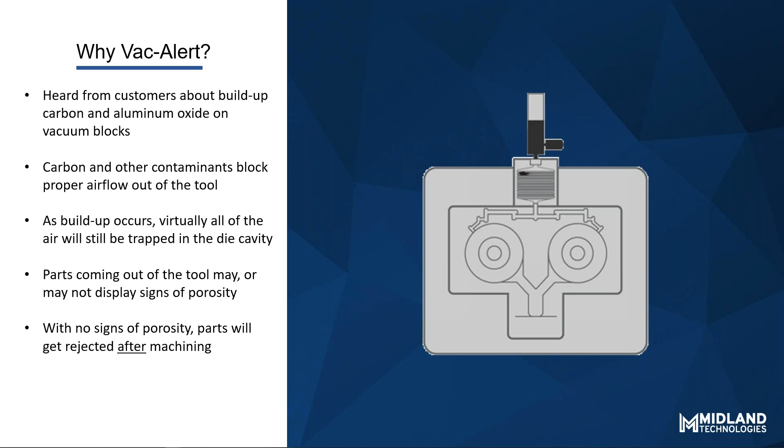So with that, the customers asked us, hey, is there any way to solve this problem? And after looking at it, we thought of a couple of different routes to go, and that led us to developing the Vac-Alert system. So there's a diagram off to the right, and it's a hardware-software system combined with transducers or vacuum sensors to monitor the vacuum system from end to end, essentially all the way out at the tool and feeding back to the vacuum pump on the other side. And the key to Vac-Alert is it can detect the vacuum level in the die cavity in real time.

And the other benefit is that it monitors key components and alerts you of situations before maintenance is needed. So it helps to troubleshoot and narrow down where a potential clog or issue is within the vacuum system. It also alerts the operator when the vacuum level is too low, and that's through the HMI system. The nice thing about our product is that you can use your own vacuum pump, whether it's a central vacuum pump or a vacuum pump at each cell that you're utilizing vacuum on for die cast machines.

So here's a larger diagram of the Vac-Alert system, and it shows the sensors all feeding back to the HMI, and again, out at the actual tool itself. And here is the iBlock, which is the heart of our system, and I'll get into that in a little more detail.

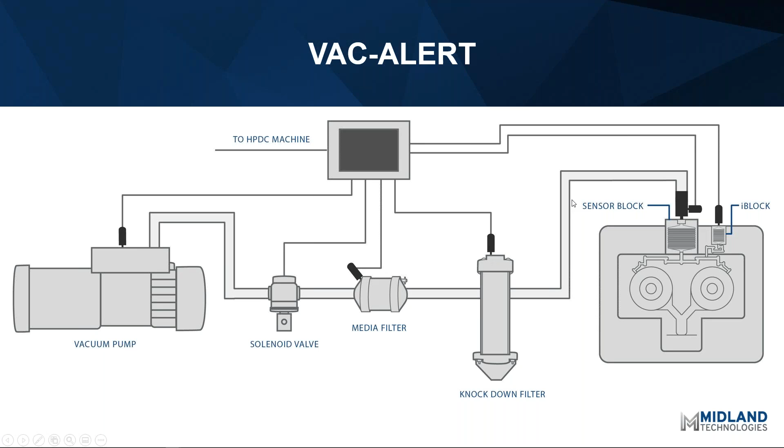But so how does the system work? Well, this is the main page of the Vac-Alert touchscreen display, and it shows the vacuum level at each one of the sensors right before fast shot.

So you can adjust Vac-Alert to set up and take a snapshot, and that's essentially what this is, a snapshot of the vacuum level, and preferably you'll want to have that configured and set up to happen right prior to fast shot so that you know what the maximum vacuum level is in the tool before the aluminum is injected

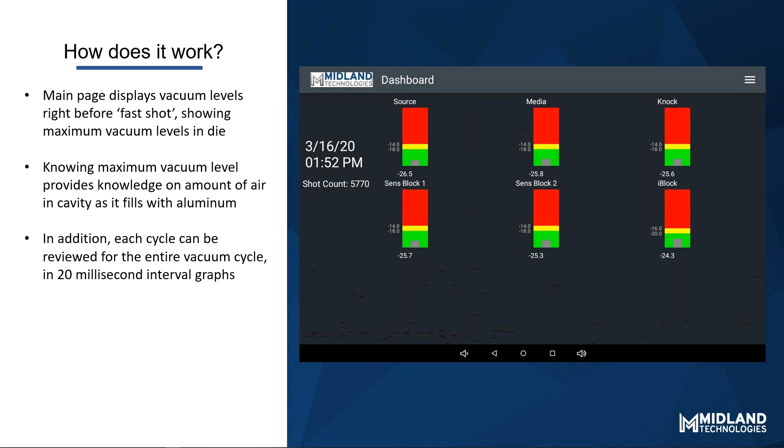into it. The nice thing about our transducers that we have as a part of the system is that it will measure the vacuum level at every 20 millisecond intervals. So 50 times every second, it is sampling the vacuum level at each one of those sensors.

And here is data from a customer site during some initial testing that we had done. And I'll kind of walk through this. These four lines right here represent sensors that are both at our filters as well as at the blocks within a tool. And the darker blue line down here is a sensor measuring the vacuum level right before the solenoid valve, essentially monitoring the vacuum level in the pump.

So once the solenoid valve opens, you see a loss of vacuum level within the pump, but that correlates with a drop in vacuum at all the other components in the system. So as air is being drawn out of the entire vacuum system from the solenoid valve all the way out to the tool, you can see this drop in vacuum to a point where a little over a half a

second into the valve being open, we've got about 75% of the air removed, and it continues down, and right before fast shot, which is right here, we're down in maybe the 27 inches of mercury level, somewhere in that neighborhood. So that led us to further validation that this is a good course to take.

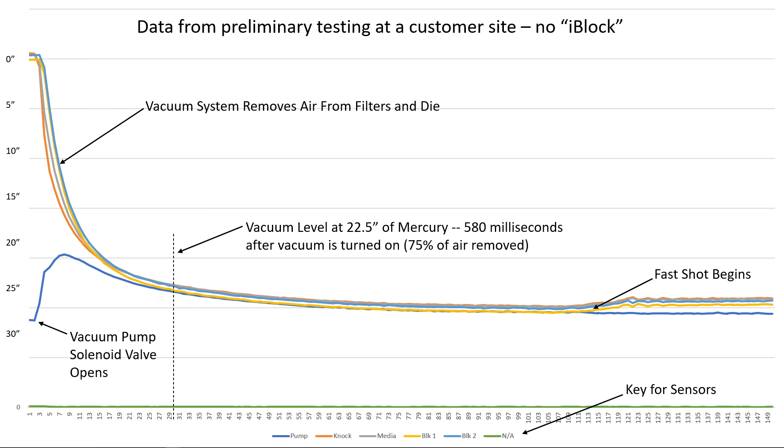And we started doing some additional evaluation and thought, hey, well, what if we install an additional block that is just measuring vacuum level within the cavity, and what kind of value would that add? So this is a piece of data where we added that iBlock to measure the vacuum level within the cavity itself.

Again, the same principle. Here are all of the other components in the vacuum system, and then this one is measuring specifically the vacuum level within the cavity. Now I'm going to go to the next slide, and you'll notice a very subtle difference in the curves right in this area, but you're going to see a significant change in the iBlock. It's going to be up much higher.

And what we did in this scenario was we blocked off or restricted the airflow for the valveless vacuum blocks, representing a clog in the blocks to show what would happen and what the iBlock would measure.

So as you can see here, there's a significant drop in the vacuum level within that cavity itself, and there was such a subtle change right here within these vacuum curves, but they much more quickly drop down to a near perfect vacuum. And I'll just go through those again and toggle between them.

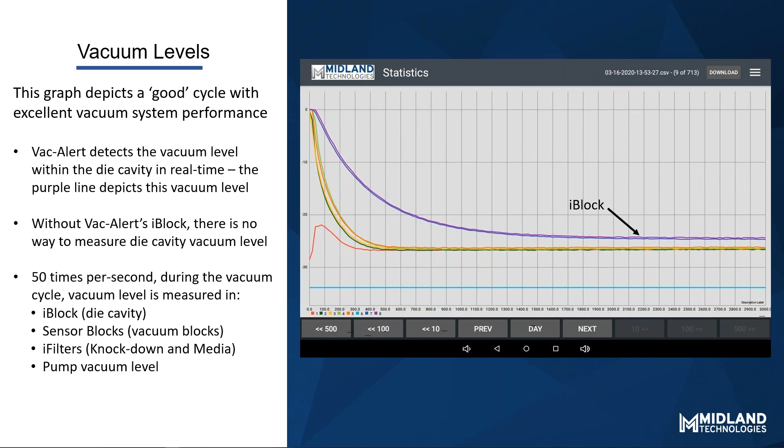So recognizing this, we realized that the iBlock is really the critical piece in the puzzle that will help die casters know what that level is within the cavity. And so we kept going down the path of developing our system with this additional block that utilizes a transducer at the top of it.

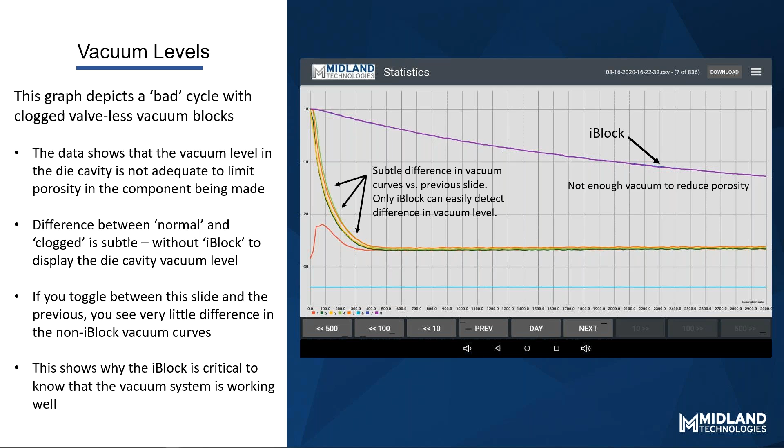In addition to that, one of the other features of the Vac-Alert system is the ability to go backwards by individual shots or by 10, 100, or 500, so that you can see the evolution of these curves over a period of time, whether it's a couple of hours or a shift or multiple shifts or even days. You can set this up and click on the day button,

and it will allow you to select other days that you may be running that exact same part, so that you can see how this iBlock is performing, so that as you see this start creeping up, you can stop everything and evaluate

whether there's any buildup on the block itself, or maybe within the different filter system or other places within the vacuum system, to do some preventive maintenance and do it at the appropriate time, rather than doing preventive maintenance too frequently, or worse, too infrequently, and therefore creating bad parts.

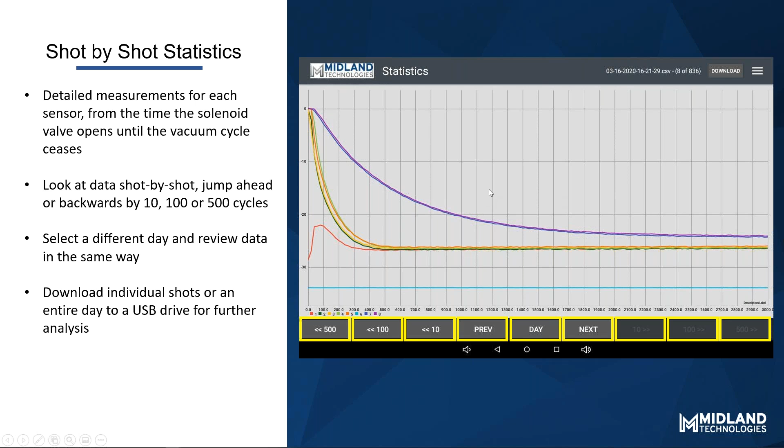The other nice thing with this statistics page within the Vac-Alert system is it allows you to also download specific shots onto a USB drive, so you can put it into an Excel spreadsheet and do further analysis.

So the iBlock is the heart of our system, and here it's designed into a runner system, but you could have it designed right into the side of a tool or into the cavity itself to measure that air. And again, it measures the vacuum level during the casting process.

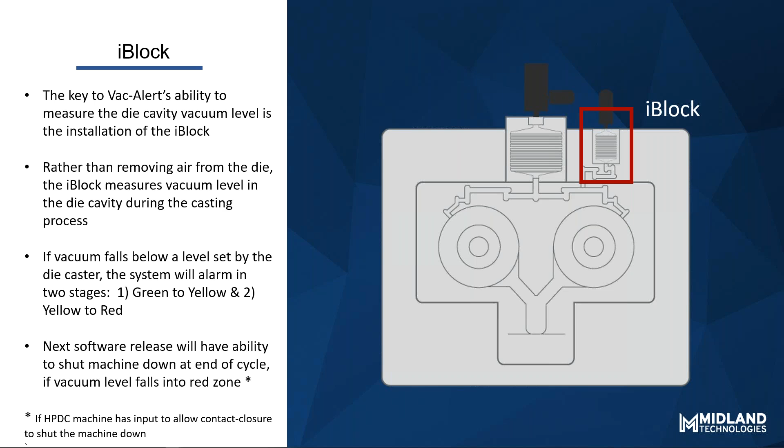And if the vacuum level falls below a certain level, you can utilize the Vac-Alert system to warn you or alert you of levels that reach a point where you're still making good parts, but it's getting closer and closer to a point where vacuum level falls low enough that you're going to see porosity and significant porosity issues.

Our next software release is also going to have the ability to shut the machine down at the end of the cycle if the vacuum level falls into a red zone. Again, that red zone is something that's adjustable by the user to whatever inches of mercury or negative PSI or however you want to set it up within the system.

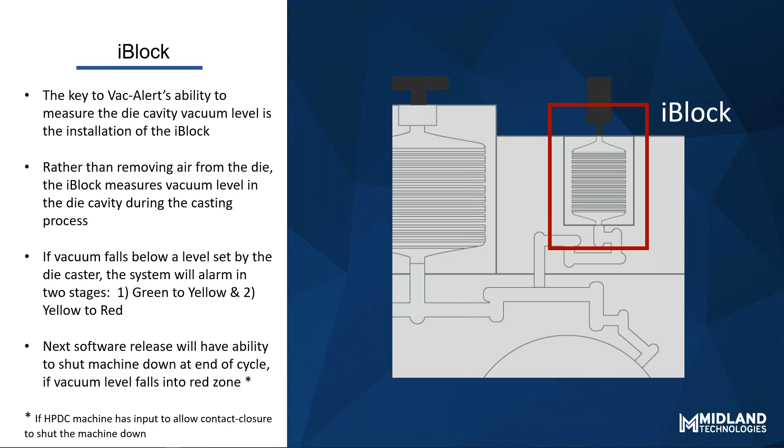But again, here's a closer look at the iBlock. It is what Midland refers to as our mini block. So it's the smallest block in our family of valveless vacuum blocks. And we did a great deal of testing to validate that we can indeed use that smallest block for the majority of applications.

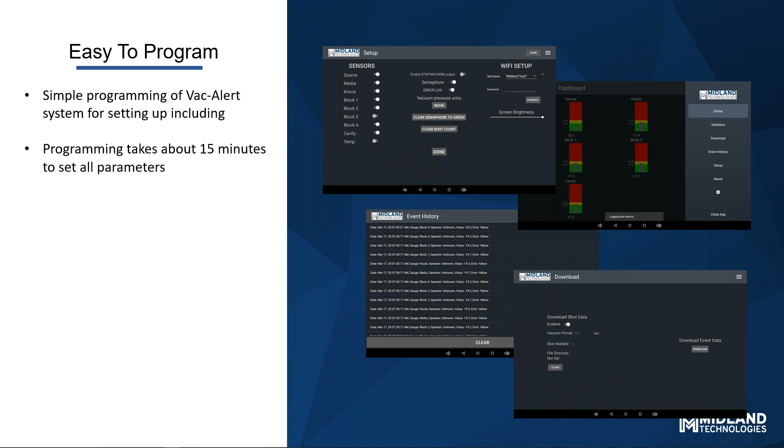And on this page over here, you're setting up the vacuum period. So whether that vacuum cycle is 3 seconds long, 4 seconds, 2.5 seconds, you select that over here and select the shot multiple. We're suggesting that everybody monitor each individual shot so that you can get all those individual graphs for them. And you're up and running. And programming takes about 15 minutes to set all of the parameters.

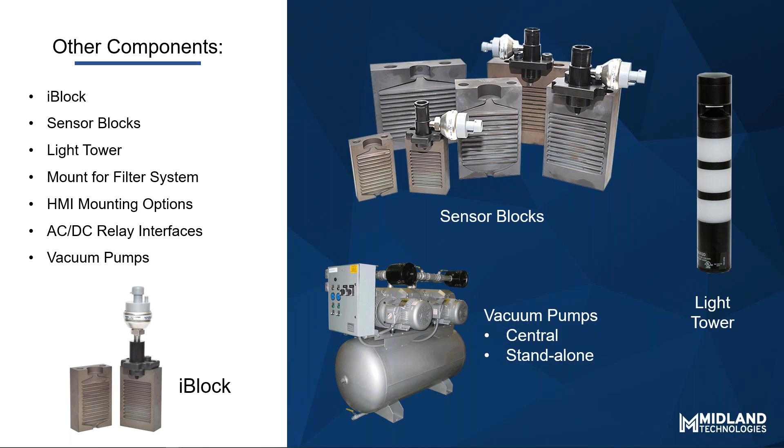A light tower is an option, along with mounting systems for both our filter system as well as the HMI. And a variety of AC and DC relay interfaces to interface with your high pressure die casting machine to initiate and stop the opening and closing of the valve and capturing the data within the Vac-Alert system. And again, even though you can use your own central vacuum pump or pumps that you may have at individual cells, if you don't have a vacuum pump, we do offer those as well for purchase.

So some of the product features for Vac-Alert: we do have a USB port for both software updates as well as downloading the data, as I had mentioned earlier. A network connection, Ethernet or wireless connectivity to obtain accurate date and time information for Vac-Alert.

And some of the features that are under consideration in the future for the system are email notifications and/or text notifications to alert people as, again, the system moves from a good to a caution to a red or problematic vacuum level within the system, as well as potentially remote monitoring from another area within the plant if you have multiple Vac-Alert systems. Maybe there's a quality or process engineer that would like to see this at his or her desk.

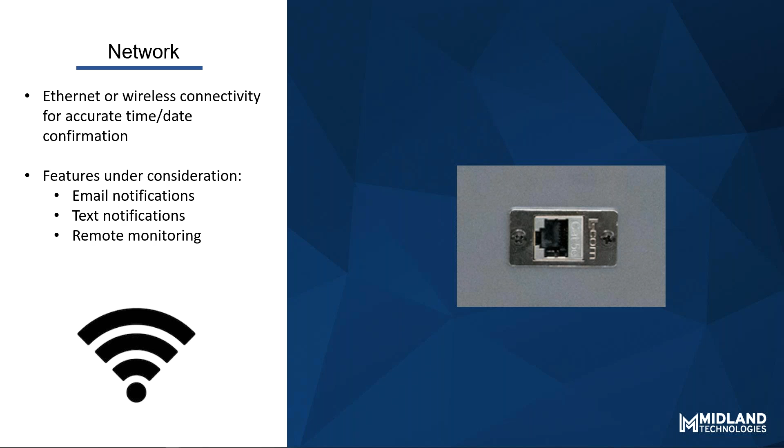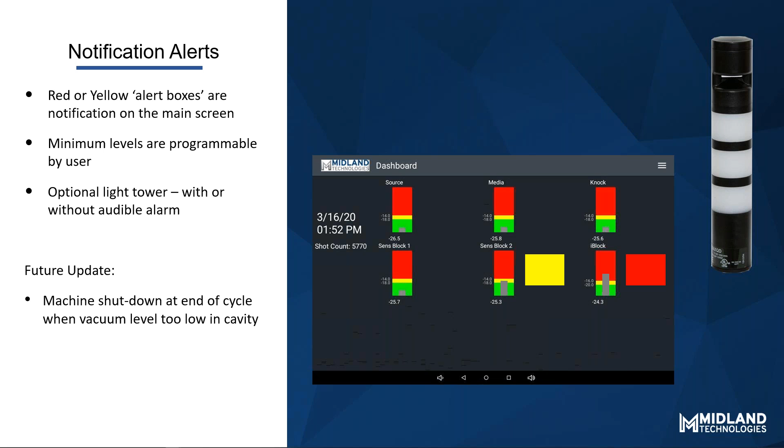And again, a future update that we're looking at for the system is machine shutdown at the end of the cycle when the vacuum level is too low in the cavity. So if the iBlock, which again is the critical one, reaches a level where it goes into the red zone, that could be initiated within our software to shut the machine down at the end of the cycle so that you can't make any additional parts that could be bad. So again, that helps to reduce any potential for scrap.

Future upgrades that we're also looking at: a humidity sensor within the die cavity itself, possibly a temperature of air exiting the tool, that both may factor into the quality of parts. Again, as I mentioned earlier, notifications and low vacuum equals machine shutdown. But that list is going to be prioritized based upon our customers' greatest needs. So as we get feedback from customers that do implement Vac-Alert, we'll be evaluating those and prioritize them accordingly.

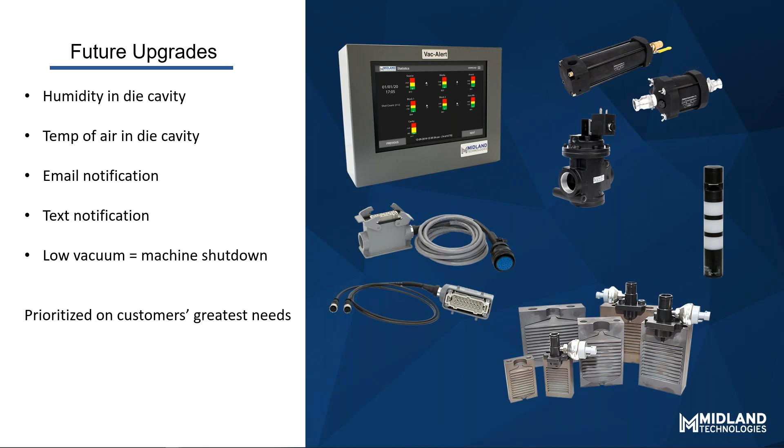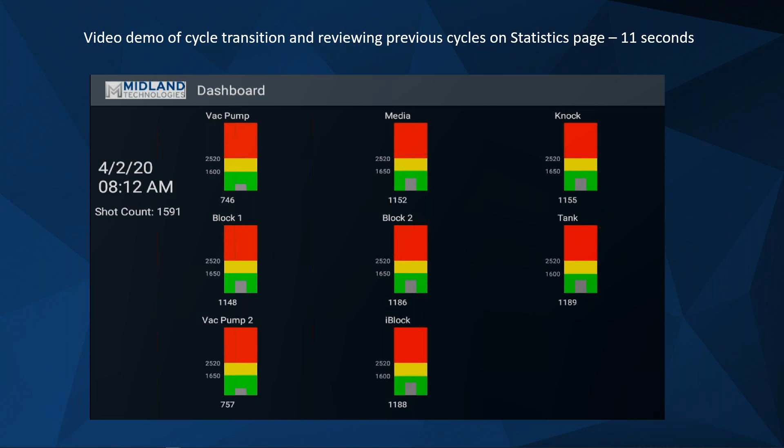So at the end of every cycle where the solenoid valve closes, that snapshot that you adjust and set up to capture the data for the main screen, whatever you set that setting at, whether it's 2.5 seconds into the vacuum cycle, or 3, or 2, it will capture and snapshot what the vacuum level is at that particular time. So again, that's the key part of the system.

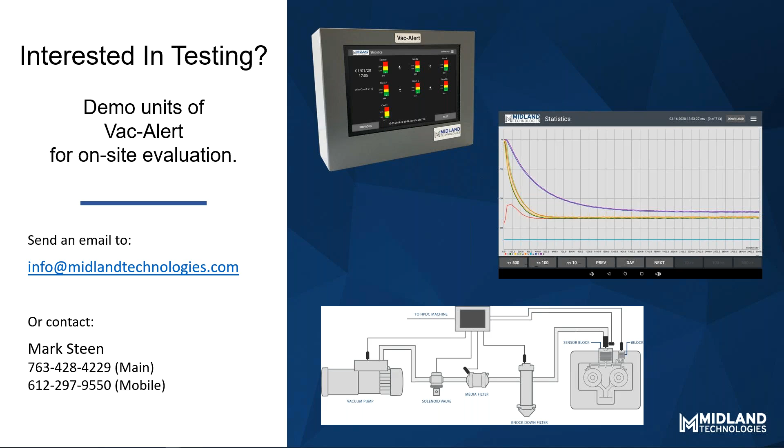I also wanted to give you a little bit of a background. Again, Steve had mentioned earlier that we're a part of a larger organization that is an employee stock ownership program. We do have 2 companies that are sister companies of ours, and one is Elmco, and I know there are a lot of die casters out in the world that are doing secondary operations within their plants, and Elmco does offer vibratory finishing equipment and industrial parts washers, and can do full custom equipment design based upon customers' needs.